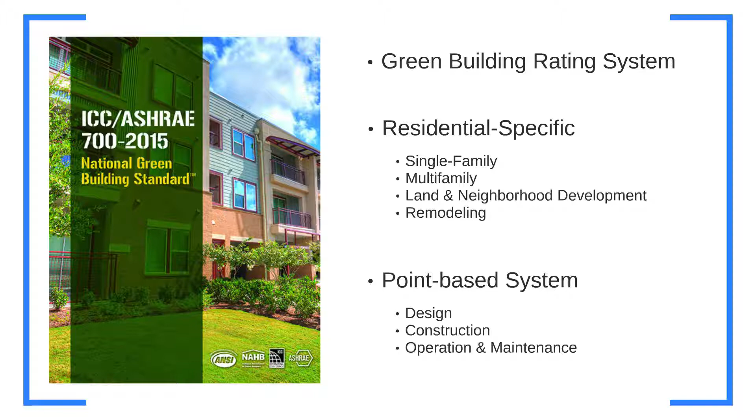Given the growth in green home building, it is critical that residential green building standards utilized by builders across the country remain up to date with the latest technology, practices, and codes. With this presentation, we will be reviewing some of the key updates and advances to the 2015 version of the standard. This version was released in May and builds upon the previous 2012 and 2008 editions.

Each edition of the standard was developed by a consensus committee of industry experts, facilitated by the International Code Council and the National Association of Home Builders. With this newest edition of the standard, the American Society of Heating, Refrigerating, and Air Conditioning Engineers, or ASHRAE, has joined the development process, with a new formal citation becoming ICC ASHRAE 700 2015 National Green Building Standard.

The standard continues to carry ANSI approval as an American national standard, maintaining a consensus-based development and ensuring a balanced and well-rounded residential green building program. The consensus committee that developed the 2015 version of the standard was comprised of 42 individuals representing a variety of government agencies, municipalities, industry stakeholders, and nonprofit organizations, including Habitat for Humanity International, the U.S. Department of Energy, the U.S. Department of Housing and Urban Development, and the American Institute of Architects.

Similarly to 2012, the Site Design and Development category continues to allow a developer to seek a standalone certification of a subdivision, neighborhood, or development site. This ability to separate a site from a building acknowledges that the builder and developer are often separate entities and allows them to strive for green certification individually.

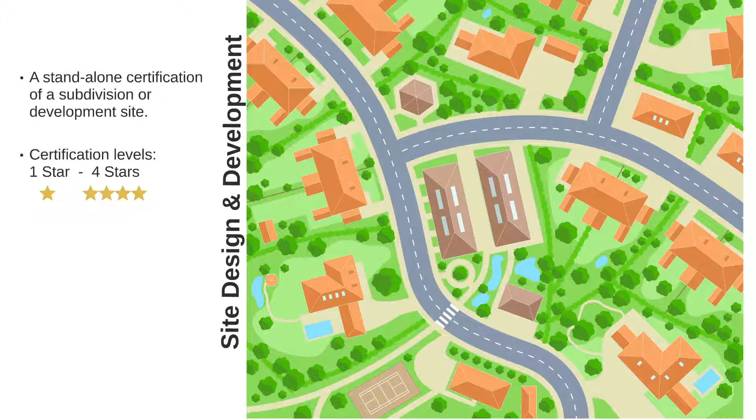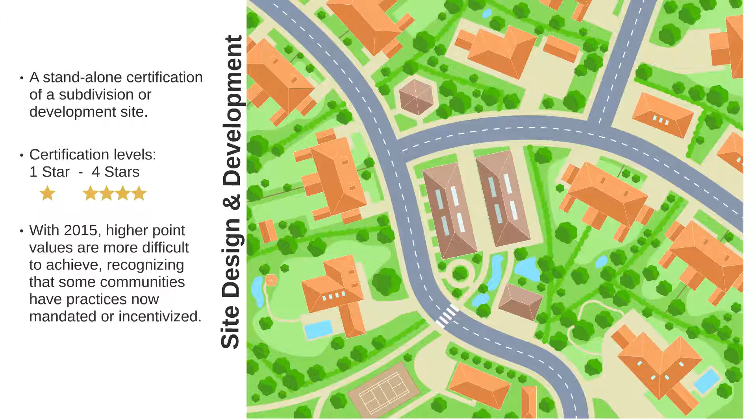Projects can still earn increasing certification levels ranging from 1 to 4 stars based on the sustainability practices integrated into its design and construction. However, with the 2015 version of the standard, achieving higher point values has become increasingly more difficult. This recognizes that some communities are already completing green practices that are now mandated or incentivized, and rewards those who go further with their sustainability efforts.

The new standard has increased its focus on the importance of stormwater management. Point values have increased for integrating more permeable surfacing into the community, increasing opportunities for infiltration and reducing runoff.

A project can also now earn more points for implementing low-impact development and green infrastructure, which promotes further infiltration and evapotranspiration. Point values are based on the ability of the LID structures to manage all rainfall on the entire site and prevent off-site discharge for the 80th, 90th, and 95th percentile storm events.

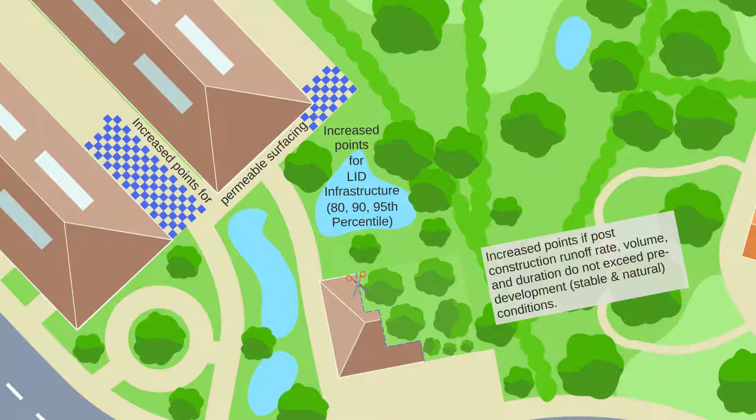Recognizing the positive aspects of zero increase stormwater management, more points are also now available if the stormwater management system is designed so that the runoff rates, volumes, and durations are no greater than that of the pre-development stable and natural condition of the site. A hydrologic analysis is required for verification.

The standard continues to encourage increased community activity within the development, and now there is a quantitative measure for the required size and proximity of parks and common areas to residents in order to earn any points. 80% of all homes and residential units must be within a quarter mile walking distance to a park or a common area that is at least one-sixth of an acre in size.

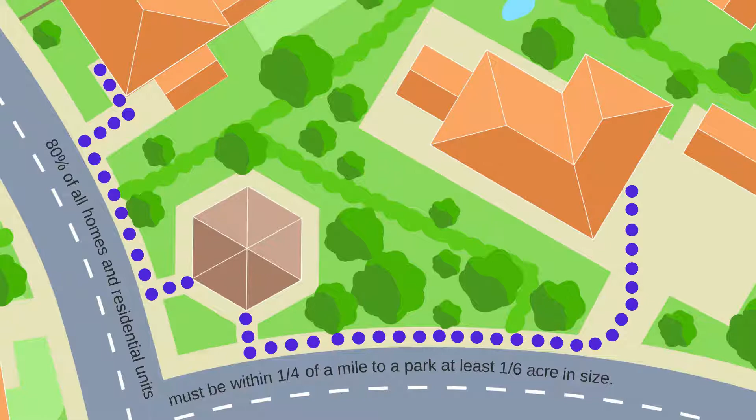In 2015, there is also an increased emphasis on multimodal transportation options, including networks of sidewalks and bike paths. A new credit allows points to be earned if there are a minimum of 90 bikeway and pathway intersections per square mile within the community. Additional points can be earned if the number of intersections is increased to 140 per square mile or more.

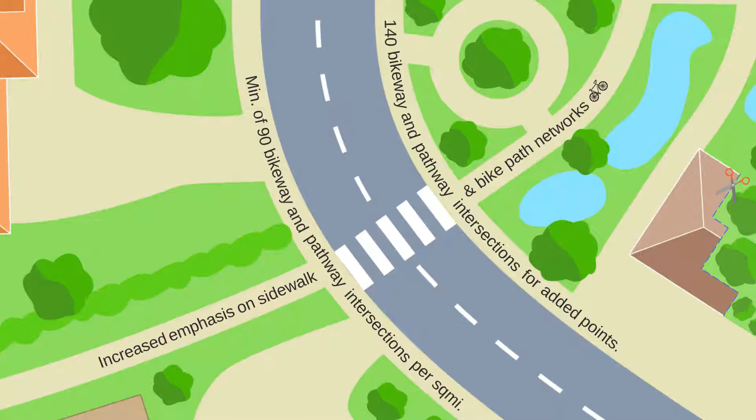Next, we'll begin looking at the six green practice categories required for an individual home to earn certification, beginning with lot design, preparation, and development.

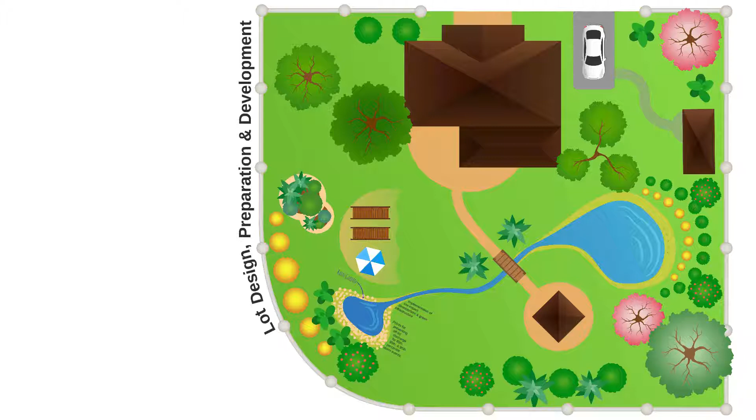This category is similar to the previous one, but on a smaller scale, with the goals of reducing environmental impact and protecting, restoring, and enhancing natural features. It is focused on exterior elements of the building, such as lot design and construction, stormwater management, landscaping, wildlife habitat protection, and heat island mitigation.

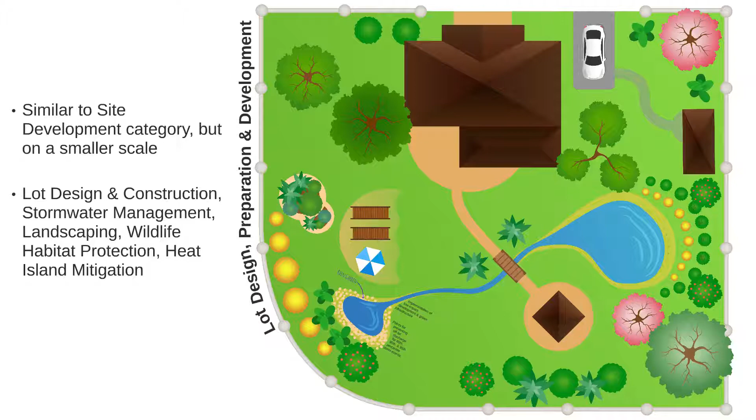New to the 2015 version of the standard, points are now earned for implementing a landscaping plan that protects, restores, or enhances native vegetation, as well as for planting native and regionally adaptive species. This style of landscaping does not negatively affect the existing ecosystem and requires less irrigation, if any.

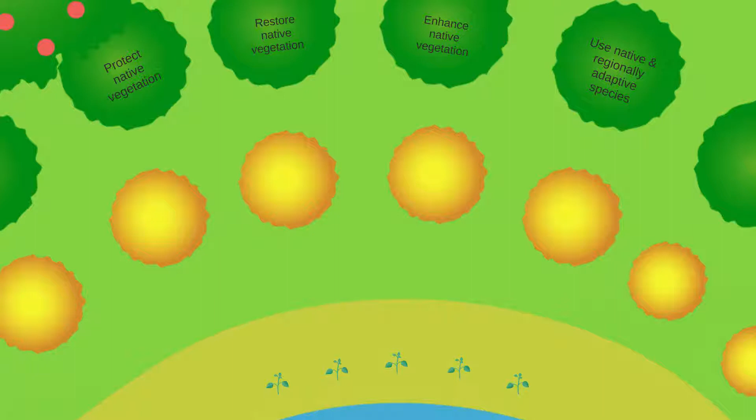Recognizing the importance of pollinators to the environment, the standard now encourages the planting or improving of pollinator habitats that make up at least 10% of the vegetated area of the site. Points are also now available for projects that remove any invasive species from the disturbed or undisturbed areas of the lot.

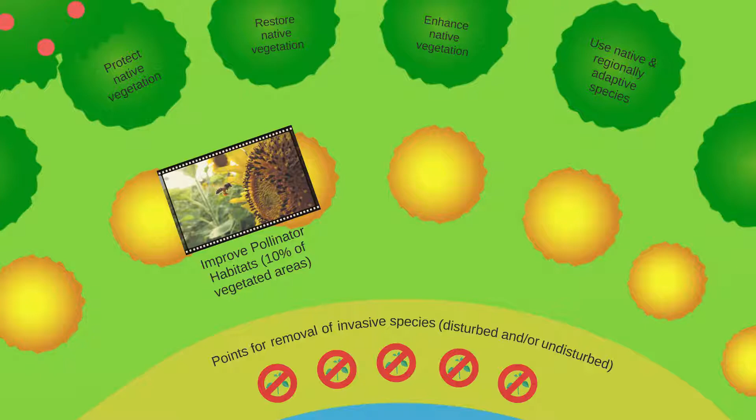Electric and hybrid vehicles are becoming more and more common on today's roads and in today's garages. Therefore, the standard has added the ability for a building to earn points for installing a Level 2 or Level 3 electric vehicle charging station. For a multifamily building, there must be enough stations for at least 1% of the total parking stalls.

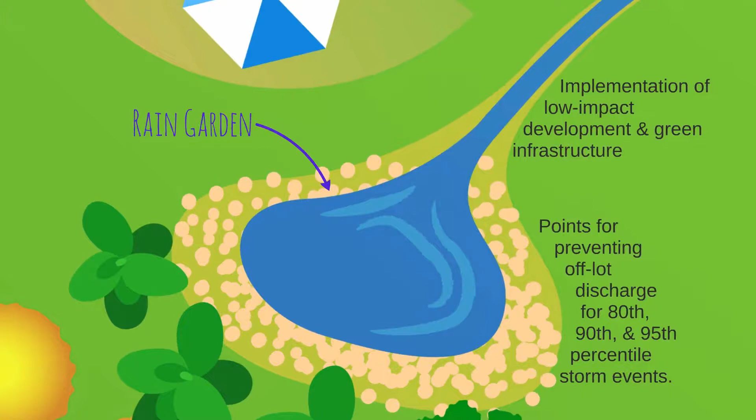Similar to the site development category, this category also emphasizes the importance of low-impact development, such as rain gardens. Points are now available for preventing off-lot discharge for the 80th, 90th, and 95th percentile storms.

Next, we will move on to the resource efficiency category. This is the second green practice category involved in the certification of a residential building.

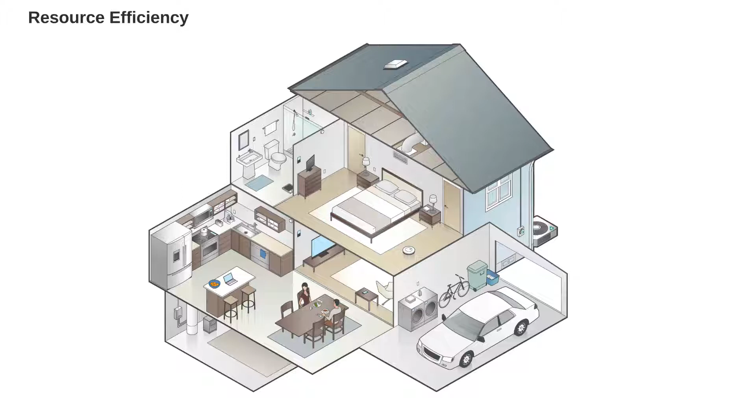This category is focused on minimizing the environmental impact of building materials, incorporating environmentally efficient building systems, and reducing waste generated during construction. This includes products and systems with enhanced durability and reduced maintenance, as well as reused, recycled, regional, or salvaged materials.

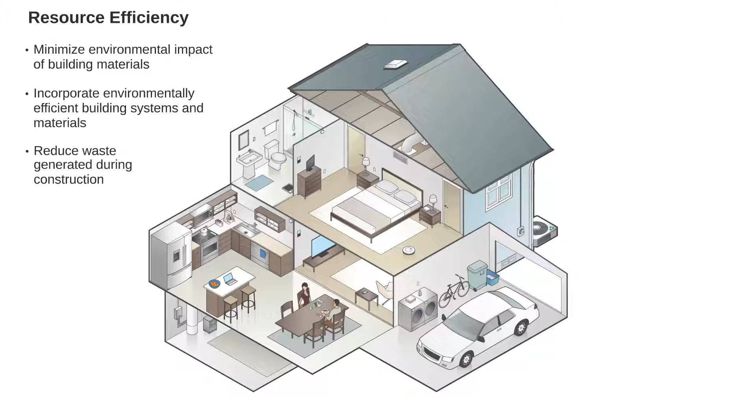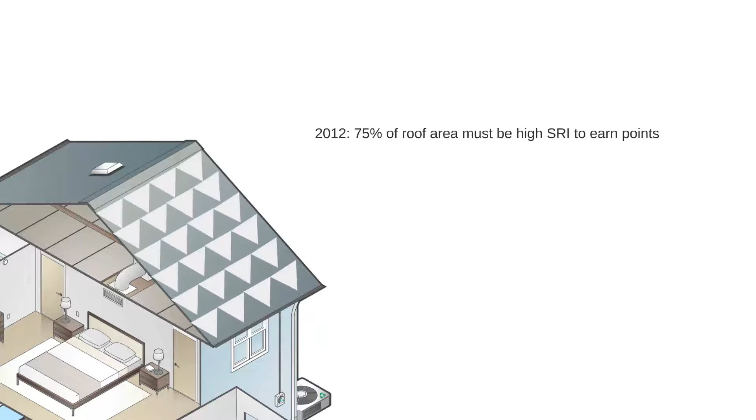With the new edition, green practices related to materials have become more stringent. In 2012, a building could earn points if 75% of the roof area was comprised of materials which had a high solar reflectance index. However, now this area has increased to a minimum of 90% of the roof area.

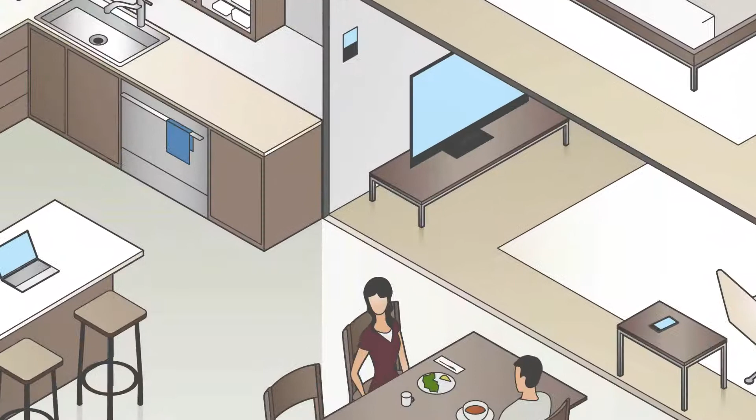Joining practices already recognized by the standard, such as performing life cycle assessments and using recycled and regional materials, the new 2015 version of the standard now also recognizes both product-specific and industry-wide environmental product declarations, or EPDs, for building materials. Product-specific EPDs are weighted higher than industry-wide EPDs. To begin earning points, at least 10 building products must have EPDs.

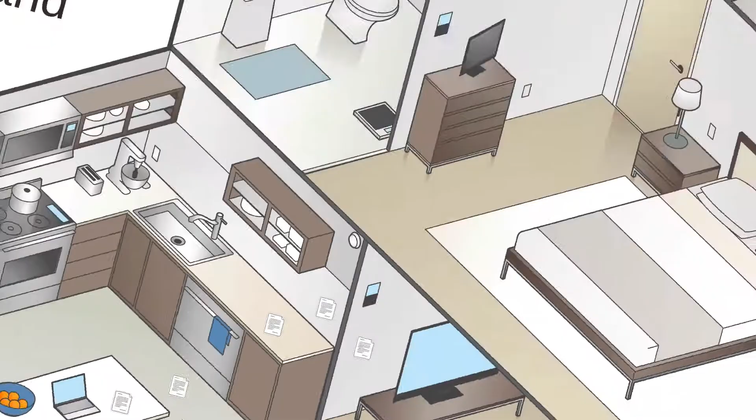Universal design, often referred to as aging-in-place design, has increased in focus in the building community as the population of individuals over the age of 65 has steadily risen. Homes built to code are often not designed around an occupant who is aging or disabled. This can lead to retrofits, which can be resource-intensive. Designing a home to suit the needs of a greater spectrum of individuals conserves resources by eliminating the need for future retrofits.

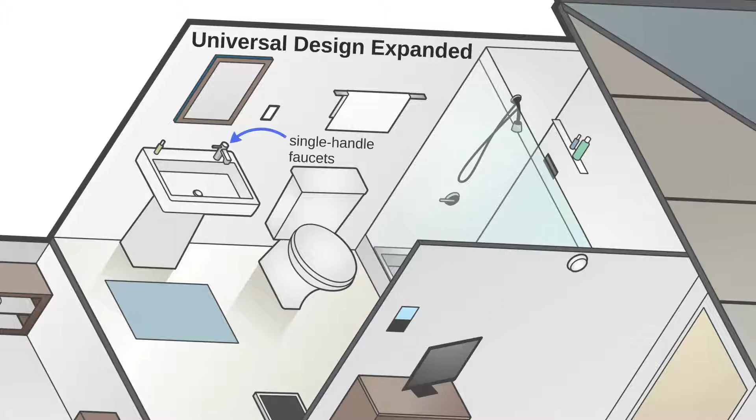The standard already has a number of universal design practices, and with the new addition, more have been added, such as providing only single-handle faucets which control both rate and temperature of water for easy control with one hand, as well as providing wireless HVAC, lighting, home alarm, or door lock controls to enable an individual to adjust these devices with minimal movement.

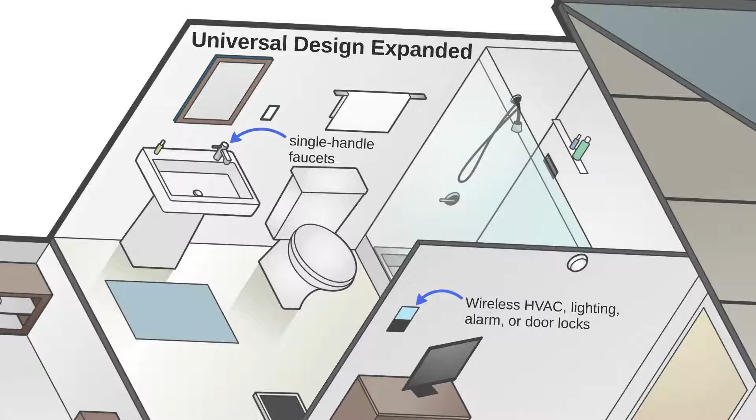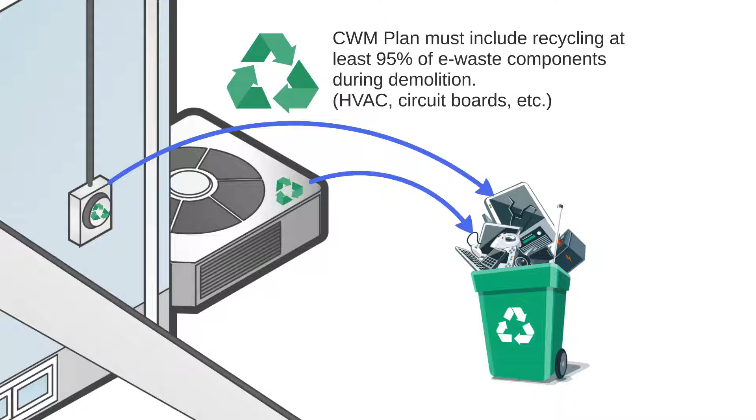When it comes to demolition of an existing structure, the standard already includes options for recycling, building reuse, and salvaging materials. Now, any construction waste management plan must include the recycling of at least 95% of all e-waste components from the existing building, including circuit boards from HVAC systems, building automation systems, and computers.

Next, we will review the energy efficiency category, which is focused on reducing the energy consumption of the home, as well as promoting use of renewable energy sources.

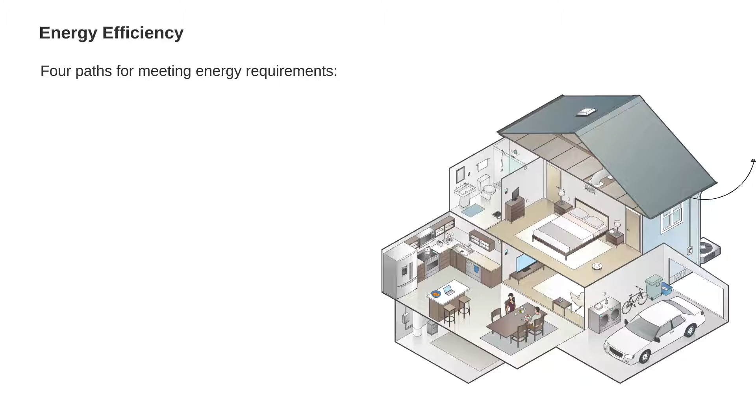There are 4 pathways a building may take in order to comply with this category. The performance path, based on energy modeling, requires that a building must meet or surpass the baseline performance in IECC 2015, the latest version of the International Energy Conservation Code. If a project is seeking Emerald certification, the highest level, it must complete the performance path and cannot select any of the other remaining options.

Projects not seeking Emerald certification have the option to choose the prescriptive path, which requires a building to earn a minimum of 30 points by selecting and implementing energy conservation measures listed in the standard. The prescriptive path also has a number of mandatory requirements, such as complying with insulation and fenestration requirements within the 2015 IECC, as well as duct system testing requirements.

New to the 2015 version of the standard, a home now has the option to utilize the HERS index to comply with this category, based on the EPA HERS index target procedure.

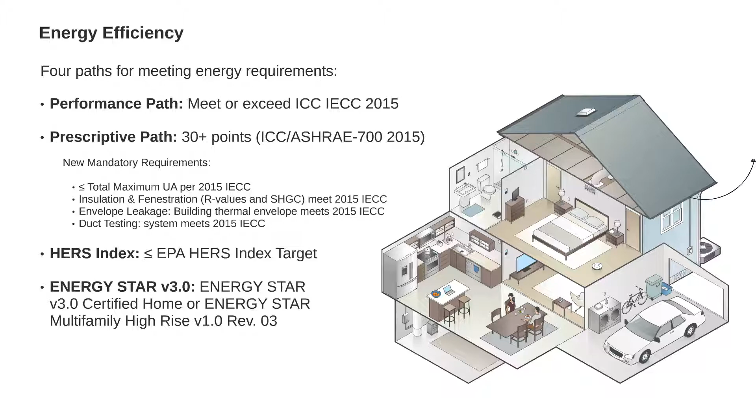Finally, an ENERGY STAR version 3 certified home or version 1 revision 3 certified multifamily high-rise complies with the minimum requirements. However, by selecting this path, the project cannot earn gold or emerald certifications. An ENERGY STAR home can only earn bronze certification, and an ENERGY STAR multifamily high-rise can only achieve silver.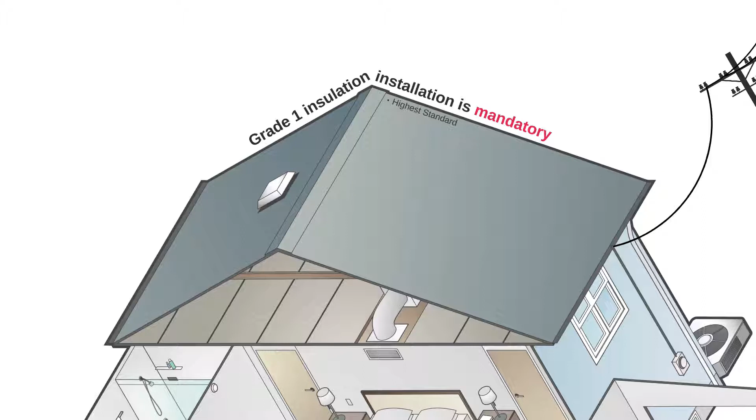A major update to the new version of the standard is the mandatory requirement that all projects have insulation installed to Grade 1 standards. Grade 1 is the highest standard of installation and applies to all insulation in the home, from floor to ceiling. With Grade 1, there are no substantial gaps or voids in the insulation, and cavities are uniformly and completely filled. When dealing with wiring and other services,

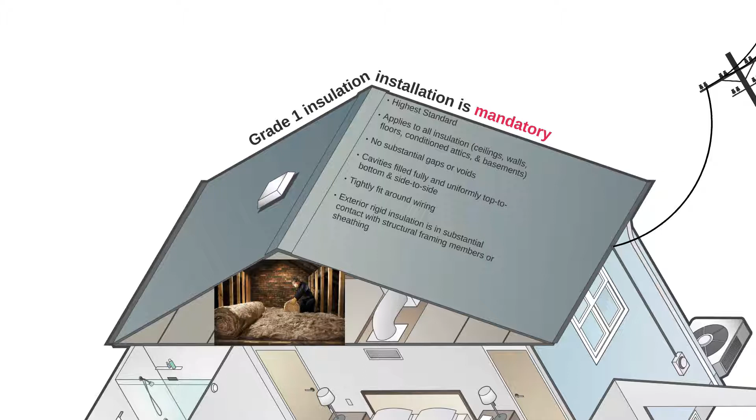Cavity insulation should be either split or fitted tightly around the wiring. Any exterior insulation must be in substantial contact with the framing or sheathing, and compression of any insulation is minimized to 2% or less. This must all be verified by an independent third party before drywall can be installed.

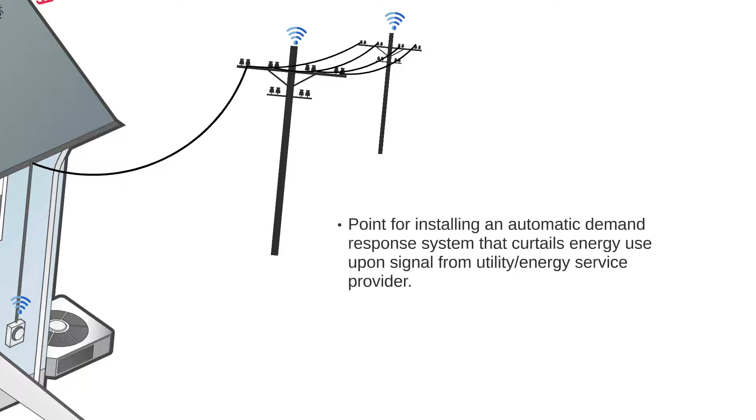Points can now be earned for installing an automatic demand response system that curtails energy use upon signal from a utility or energy service provider. Additional points are available for grid interactive electrical thermal storage systems as well, such as water and space heating systems.

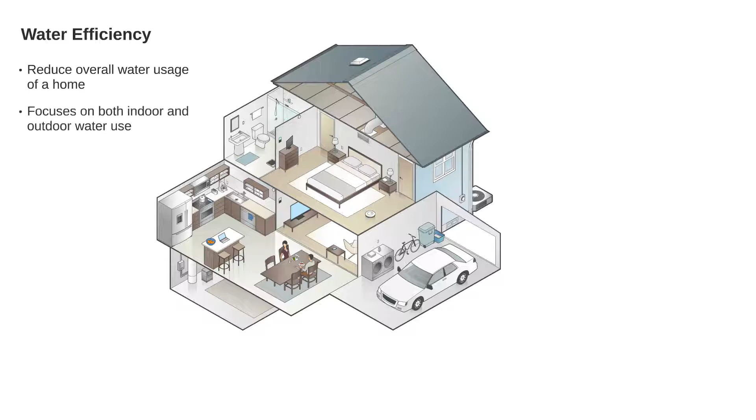Next, we will shift from efficiency in energy to efficiency in water use. The water efficiency category has the goals of reducing the overall water usage of the home, focusing both on indoor and outdoor water use. Not only are water reduction strategies provided, but the standard also encourages the capture and reuse of initially non-potable water, such as gray water and rainwater on site.

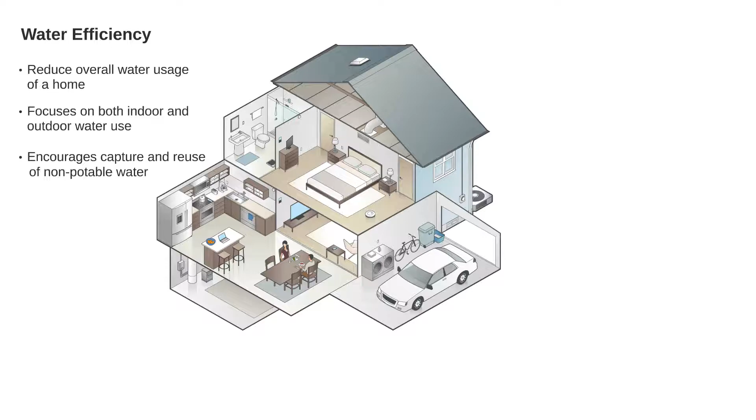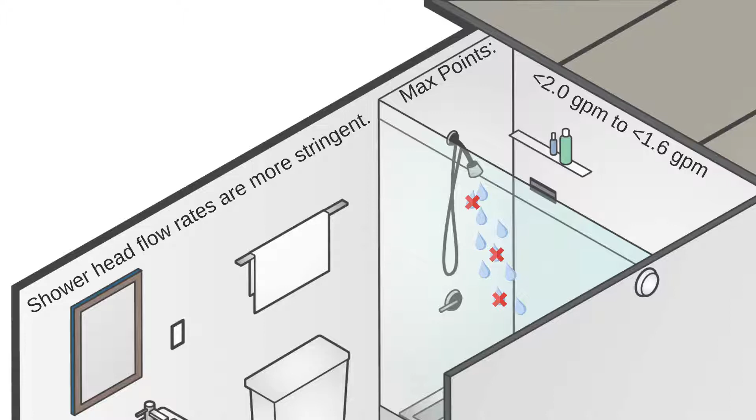With the new edition, points awarded for showers with reduced flow rates have become more stringent, and now, in order to earn the maximum points available, showerheads must have a flow rate of less than 1.6 gallons per minute. This is a reduction from the previous required flow rate of 2.0 gallons per minute in 2012.

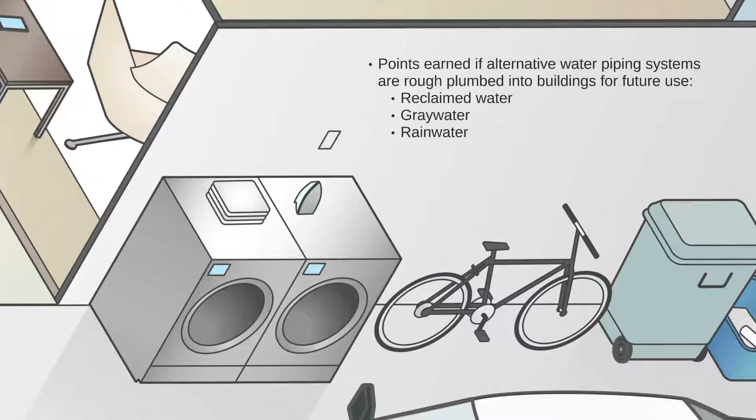In the previous edition of the standard, points were available for a home that utilized reclaimed, gray, or rainwater, but a number of jurisdictions have limitations or restrictions on the use of these water sources inside the home. While the standard still awards points for use of alternative water sources, encouraging project teams to work with jurisdictions to achieve this, it also now awards points for builders that rough plumb these systems into the building for future use. This will allow homes to be ready should the owner and municipality move towards alternative water sources. All piping must be permanently marked, tagged, or labeled appropriately.

Outside of the home, the standard now requires that if irrigation is installed, all irrigation plans and implementation must be executed by a qualified professional certified by a WaterSense labeled program or equivalent. Additional points can now be achieved if irrigation controllers installed on the property are labeled by WaterSense.

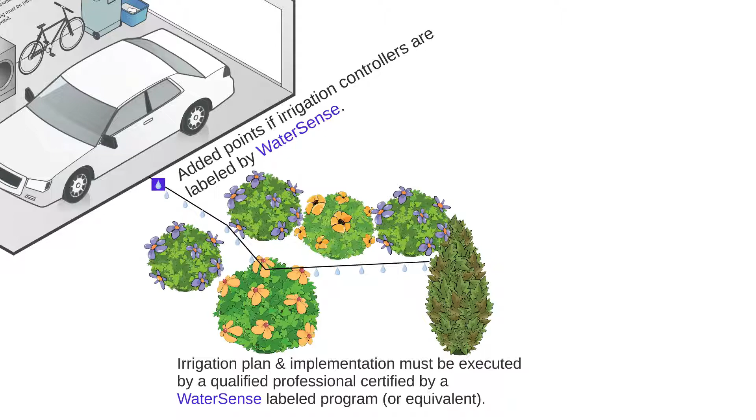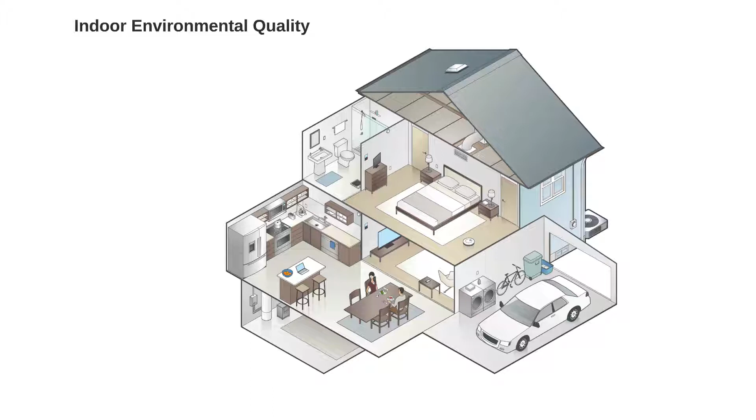Beyond efficiencies, a major aspect of green building and sustainability is air quality and the indoor environment of the home. The goal of the Indoor Environmental Quality, or IEQ, category is to reduce the possible pollutants inside the walls of the home that originate from a variety of sources.

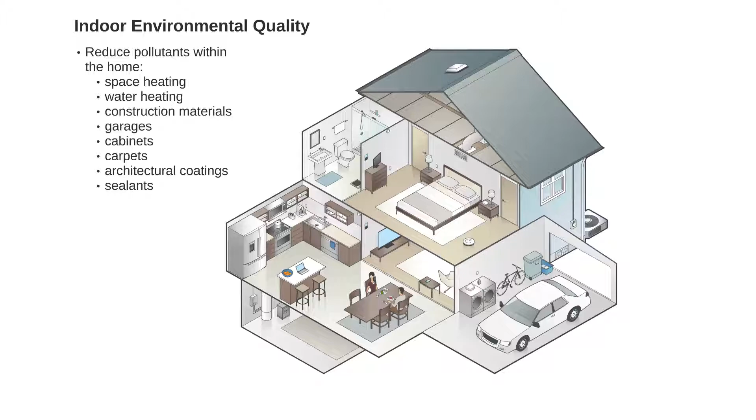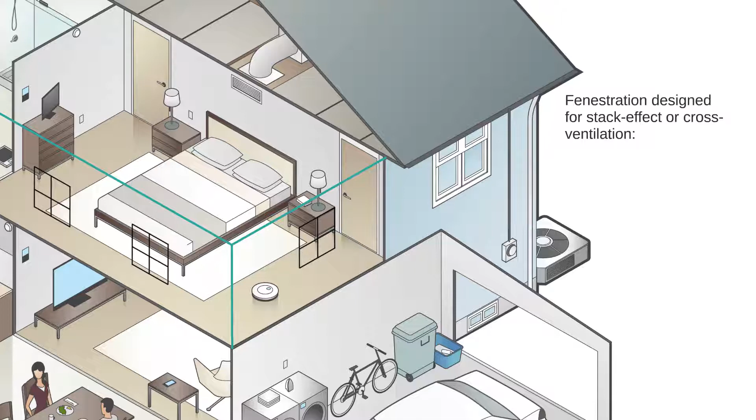The new edition of the standard has added points for designing the home and fenestration to achieve stack effect or cross ventilation, bringing outdoor air into the home. At a minimum, the standard requires at least 2 openings in a space on opposite or adjacent walls. All openings must be operable, such as windows or skylights, and all openings must have insect screens. The area of the openings must be at least 15% of the floor area of the space.

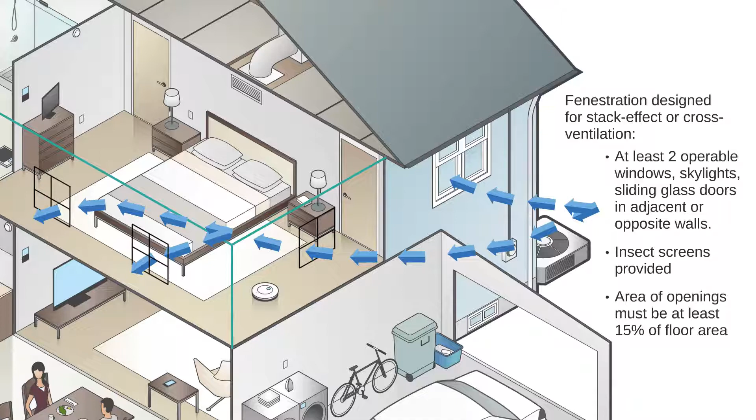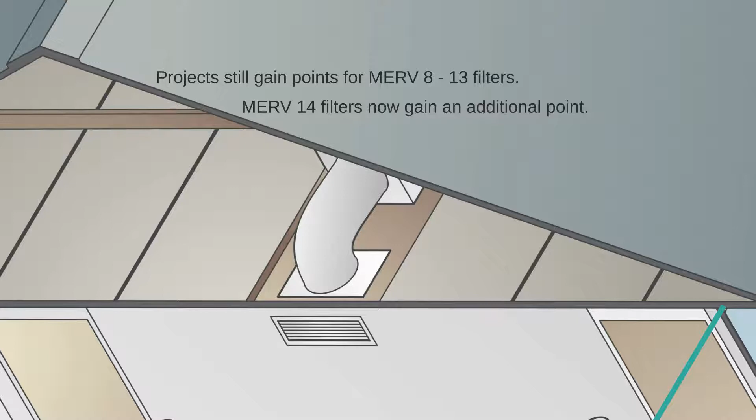When it comes to mechanical systems, projects can still earn points for having MERV 8 to MERV 13 filters, but now the standard has added an additional point if a MERV 14 filter is installed. Verification is required that the HVAC system can accommodate the greater pressure drop with this type of filter.

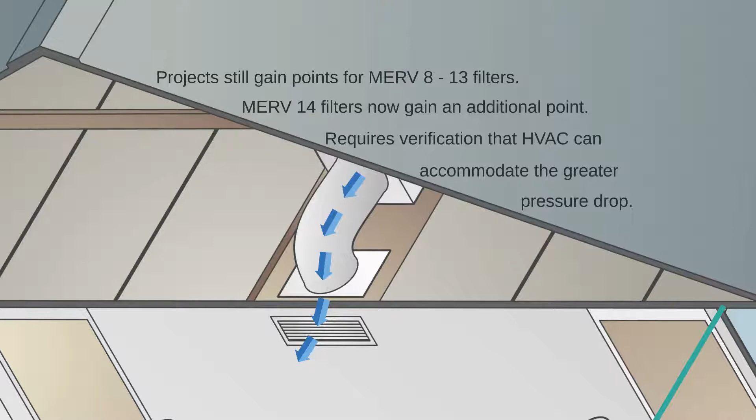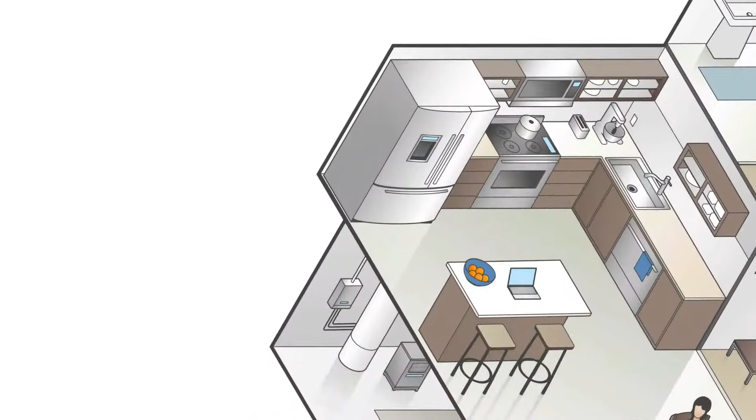The standard has also added the practice of implementing indoor air quality control measures throughout construction, such as keeping materials dry and ensuring emission requirements are met. Additional points can be earned if post-construction verification of the quality of indoor air is completed.

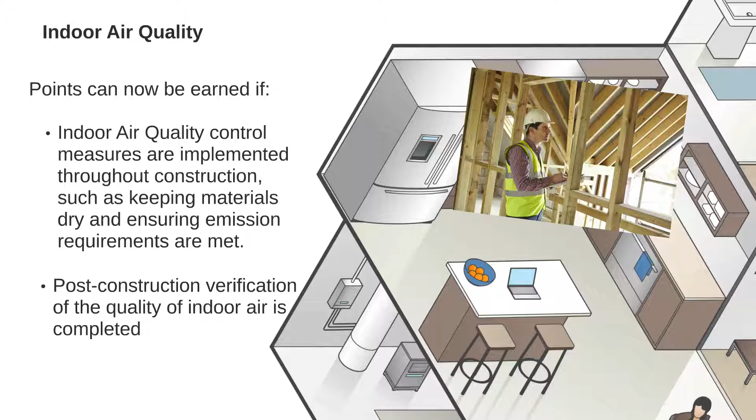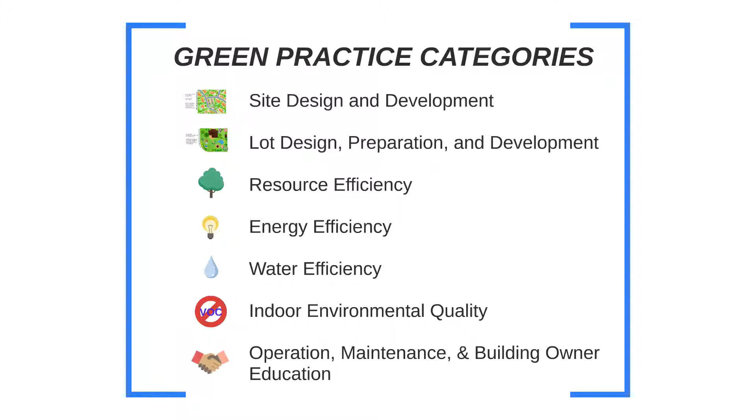The final category involved in the certification of a home is operation, maintenance, and building owner education. This category is essential to the long-term sustainability and optimization of a home, as the resident's behavior is a key part of keeping the home running efficiently.

The new standard now requires first-hand training of the initial building or homeowner, ensuring the occupant has the necessary education to operate their home and its systems correctly and efficiently. This includes items such as HVAC filter maintenance, thermostat programming, and even recycling and composting practices.

Points are now available for projects that offer resources for public education on how the building is utilizing green building practices, such as informational signage, certification plaques, and online resources.

Post-occupancy performance assessments are also encouraged, allowing for owners to determine if any energy or water usage has deviated from expected levels, and if any necessary inspections or corrections should be made. A building verification system to monitor energy and water use can be used to measure consumption the first year of occupancy and then compare it to annualized consumption at least every 4 years moving forward.

The standard can be your guide to creating an efficient, healthier, and eco-friendly living space, and we hope this presentation has provided you with the tools to move forward with getting your next residential project NGBS certified. Thank you for your participation.